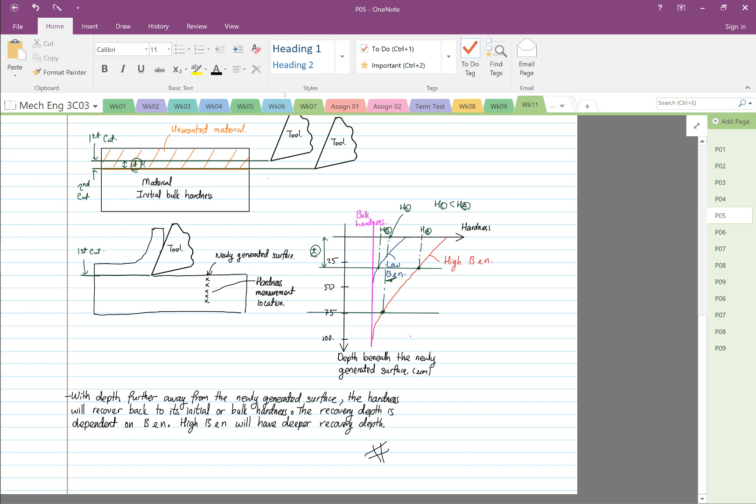Hi, this is the continuation of week 11 lecture, where we finish off by mentioning that if the material is strain hardening sensitive, you have to have a deeper depth of cut. As you can see, after the workpiece has been machined or processed, with high B and N the hardness is higher, and with low B and N the hardness is lower on the newly generated surface.

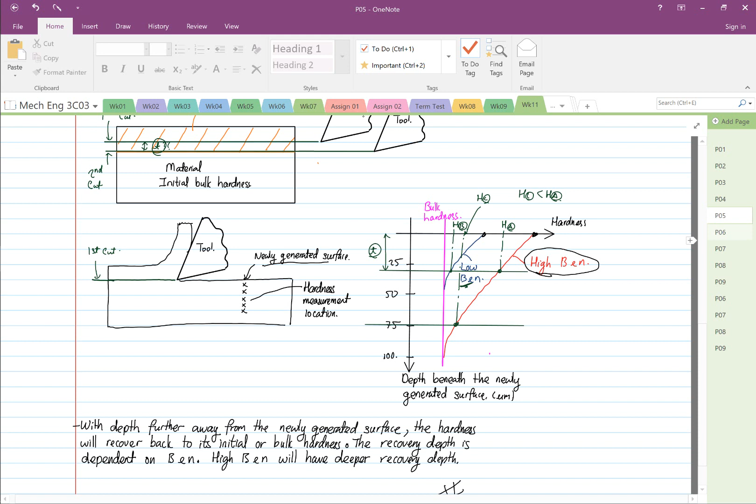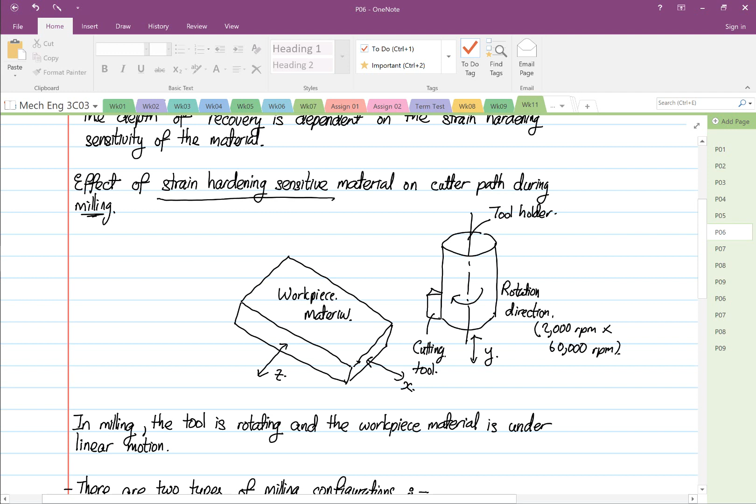So to continue, we are going to look at the effect of strain hardening sensitivity on cutter path during milling. This is a milling operation where you have a tool rotating between 2000 and 60,000 RPM, and the workpiece material is in linear motion in X or in Z direction. If you go to YouTube and type the word milling, you will see the process.

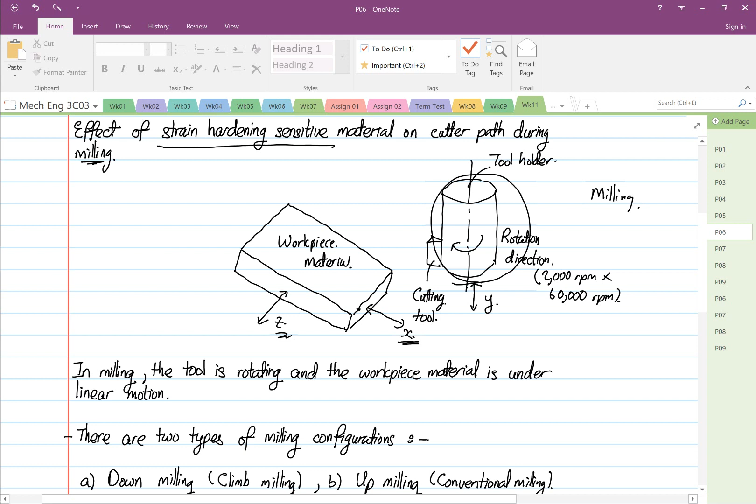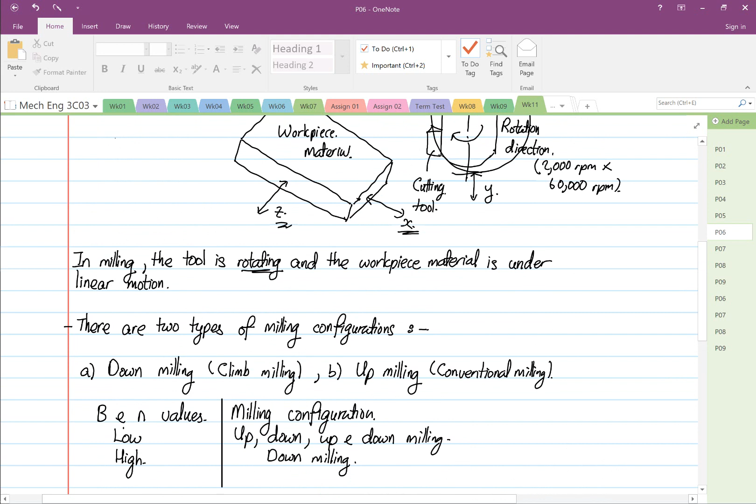So in milling, the tool is rotating and the workpiece is under linear motion, different from turning. And there are two types of milling configuration: down milling and up milling. One is known as down, the other one is up.

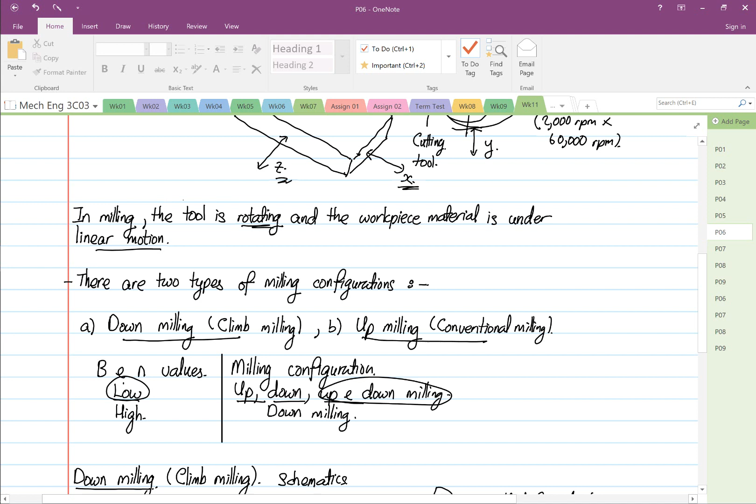So if you look at the B and N value, if you have low B and N, it does not matter whether you do up or down milling, or up and down milling, which I'll explain to you later. If you have high B and N, you only can use down milling. What do I mean by down milling?

So this is the schematic of down milling. In down milling, the undeformed chip thickness starts from thick and goes to thin. This is the tool motion. And if you look over here, I have superimposed the hardness value, the hardness distribution.

And when the material is strain hardening sensitive, you have to do down milling, or we call it climb milling. It's because if you do down milling, the workpiece will hit the tool where it's softer. As you progress further, the hardness increases, but it's okay, because the temperature in theta 2 is higher than theta 1, so it's okay.

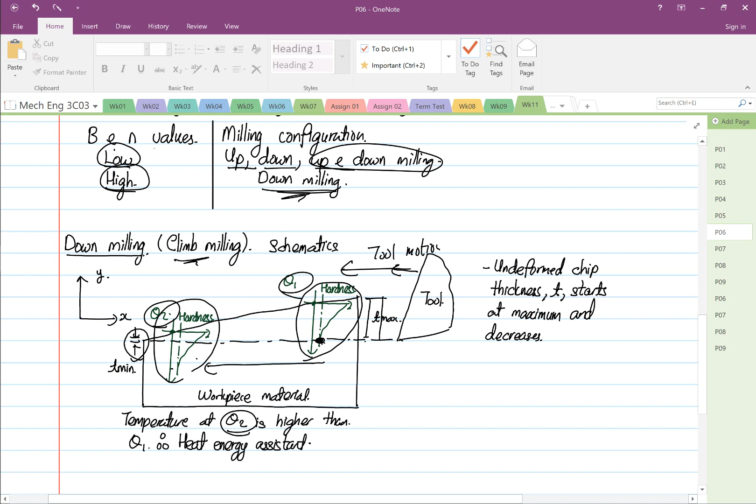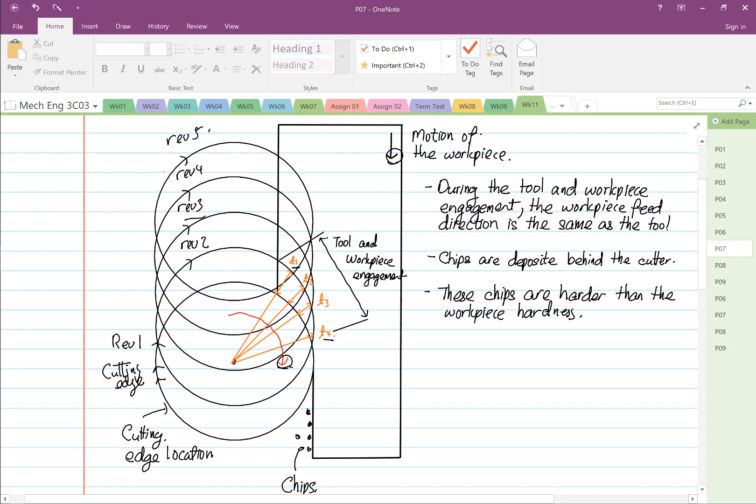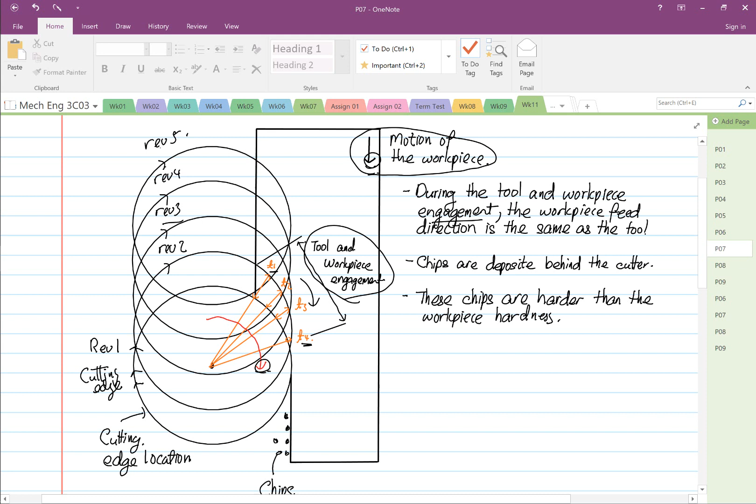So further on, this is the motion of the workpiece, and this region is the tool and workpiece engagement region. The workpiece feed direction is the same as the tool. So if you look over here, the tool is rotating in this direction, and the feed direction is also the same during engagement. The chips are deposited over here.

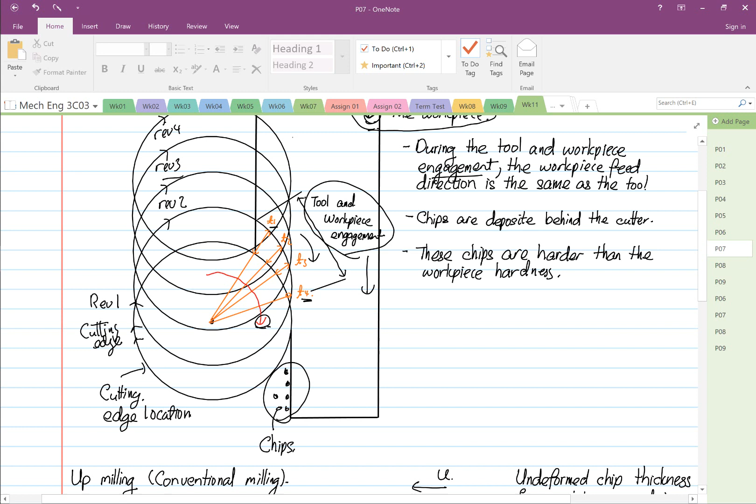So when that's the case, the chips are harder than the workpiece, so you have to be careful. These are very hard, but they're deposited behind, so it's okay.

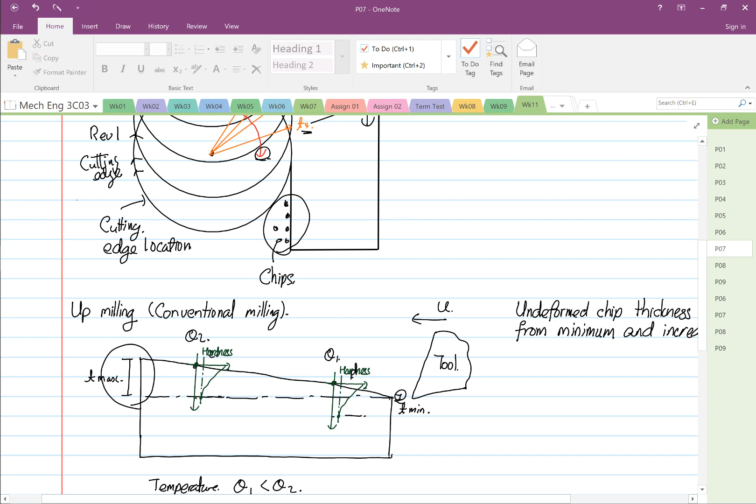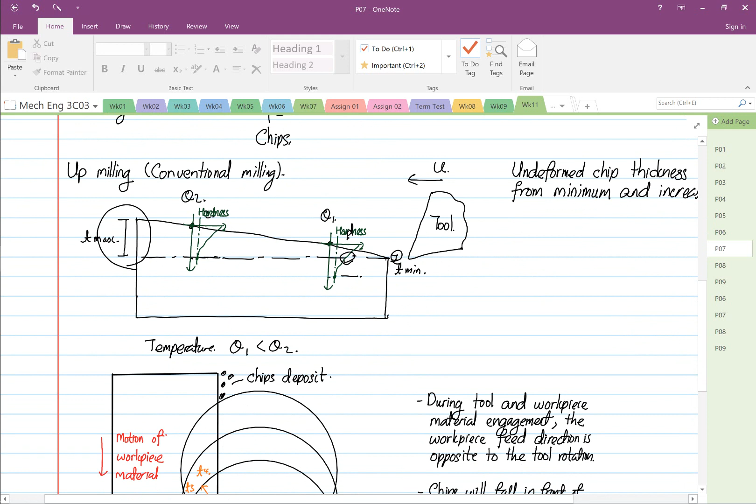In up milling, the undeformed chip thickness starts from thin to thick. So when that's the case, you can see the problem: it's going to hit the workpiece when it's very hard. And as usual, θ2 will be greater than θ1.

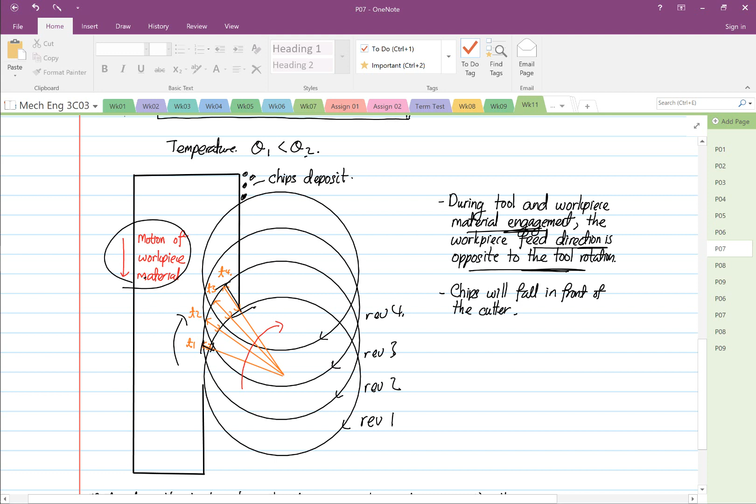So doing up milling, you see the undeformed chip thickness starts from thin and goes up to thick. You can see if this is the vector of the rotation of the tool, this is the motion of the workpiece, and during engagement, the feed direction is opposite to the tool rotation, and the chip will fall in front. When the chip falls in front, it's bad news because the chip can be carried by the cutting edge and hit the workpiece again.

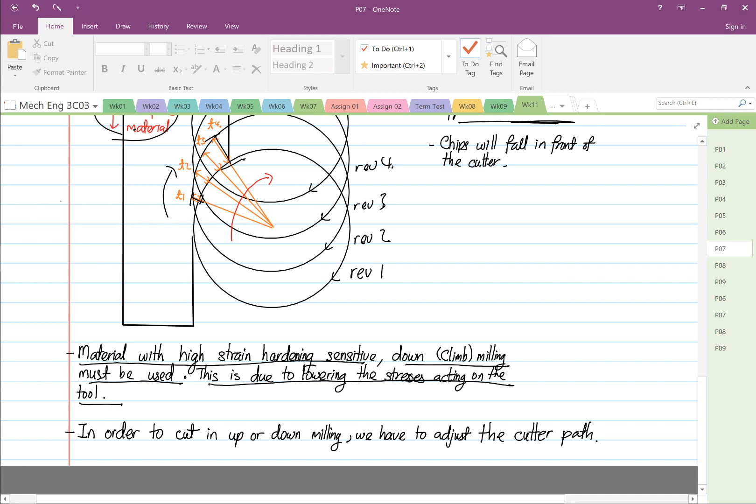Coming back to strain hardening, now that you know the difference between up and down (climb) milling: material with high strain hardening sensitivity must use down milling. This is due to lower stresses acting on the tool. Down milling hits the material where it's softer, or lower in hardness.

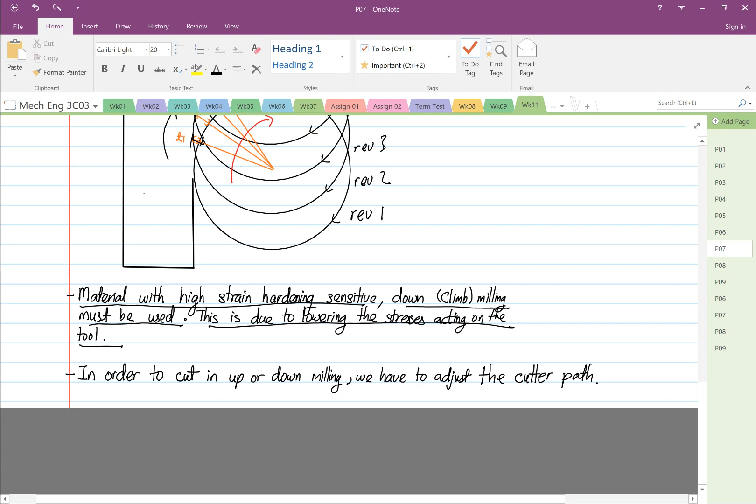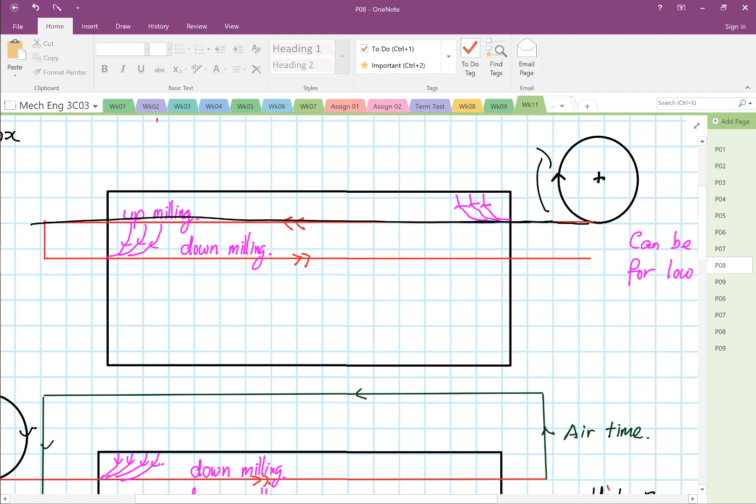In order to cut in up or down milling, we have to adjust the cutter path. Here's our workpiece material and our tool, with the red line as the cutter path. When the tool moves from right to left with the tool rotating in this direction, it's doing up milling. Then on the next pass, it does down milling.

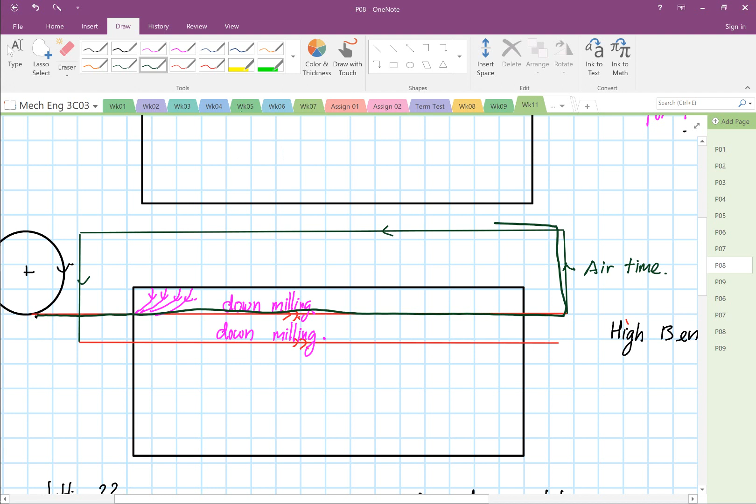This can only be used in low Ben. In high Ben, you have to start from here instead, so that every cut is down milling, down milling, down milling. Then it goes up again, over to the other side, comes down, and continues down milling. This is what we call modifying the cutter path—come back, air time, start cutting again, and repeat for the next pass.

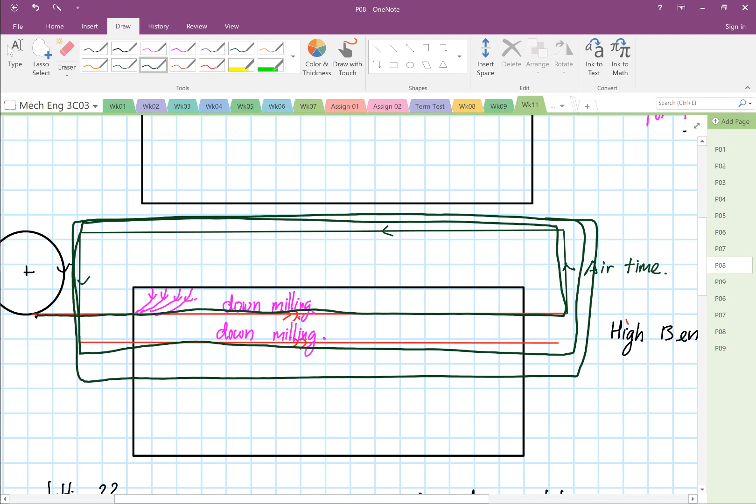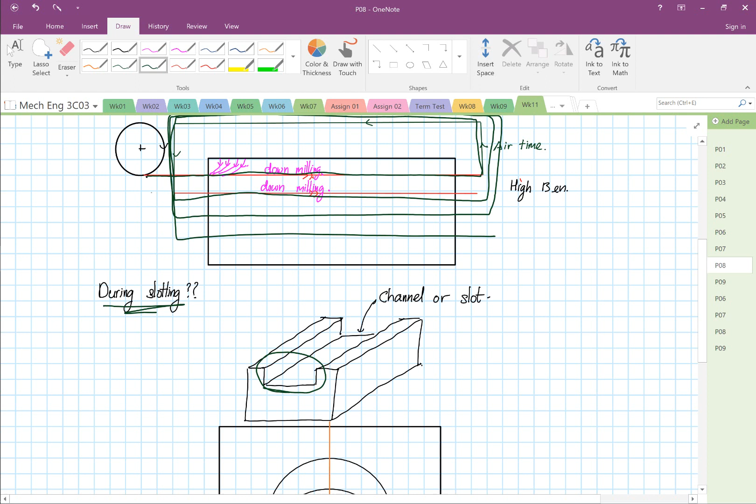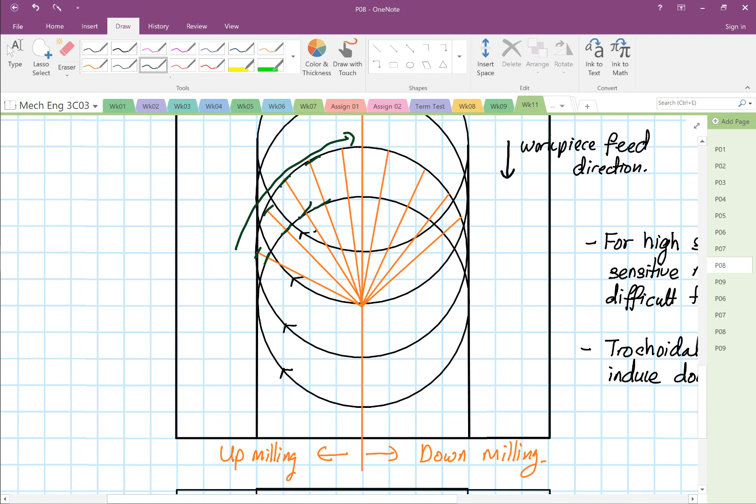Now, how about slotting? Slotting creates a channel like this, and it's always really difficult. Why? Because the tool has to pass through—down here you see the undeformed chip thickness go from thin to thick, and on the other side it goes from thick to thin. So it's a mixture of up and down milling.

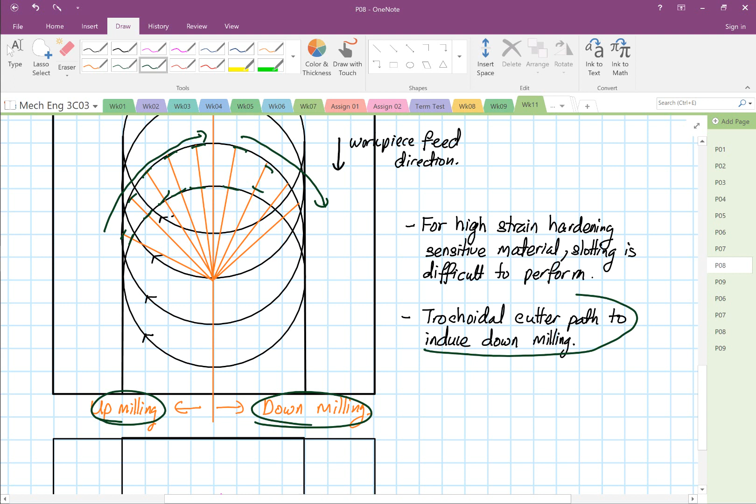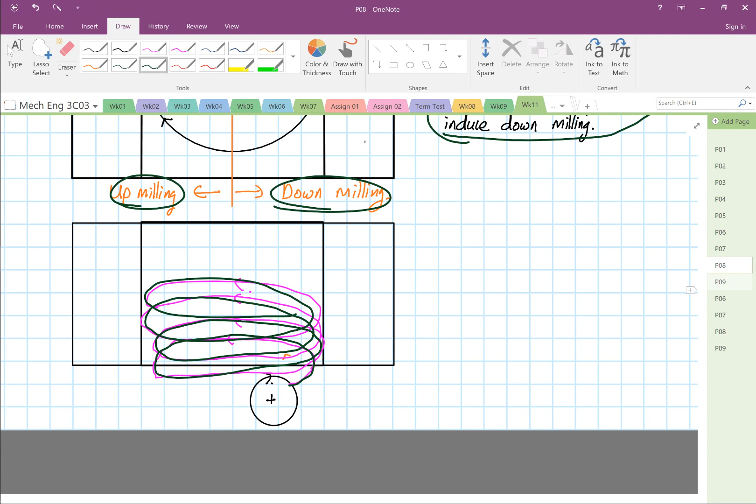The only way to do this is to use a trochoidal cutter path, where your tool path moves this way. This is the only way to machine strain hardening sensitive material, by using this cutter path. So when a material is strain hardening sensitive, you have to do trochoidal cutter path. You can look up trochoidal on YouTube to see better what I mean.

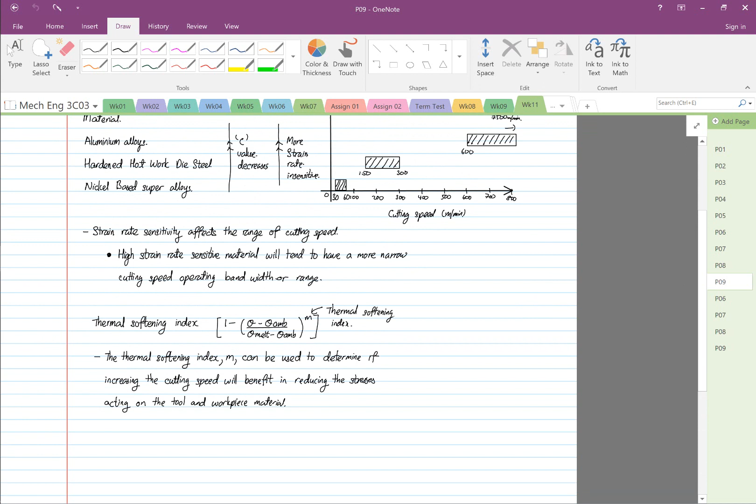Lastly, we're looking at strain rate sensitivity. Here we have materials: aluminum, hardened hot work steel, and nickel-based superalloys. The C value decreases as you go up this list—when you go to aluminum, C is lowest, nickel is highest, meaning aluminum is more strain rate insensitive.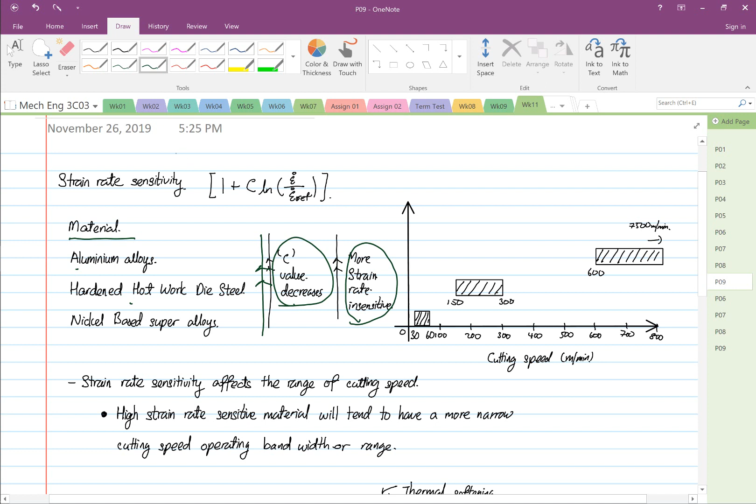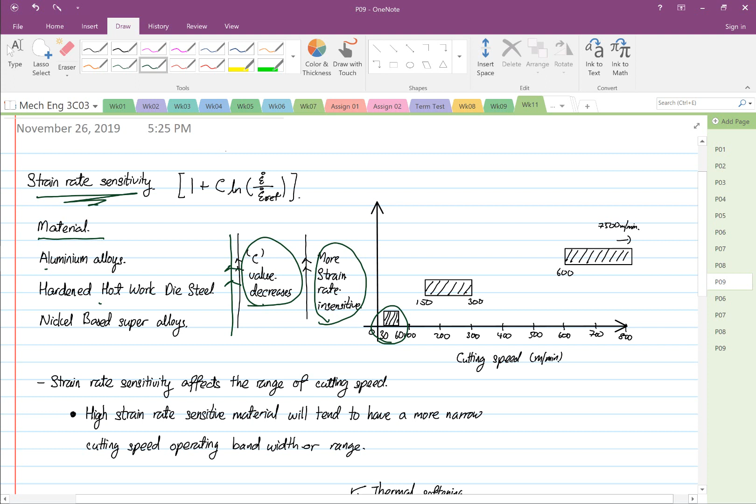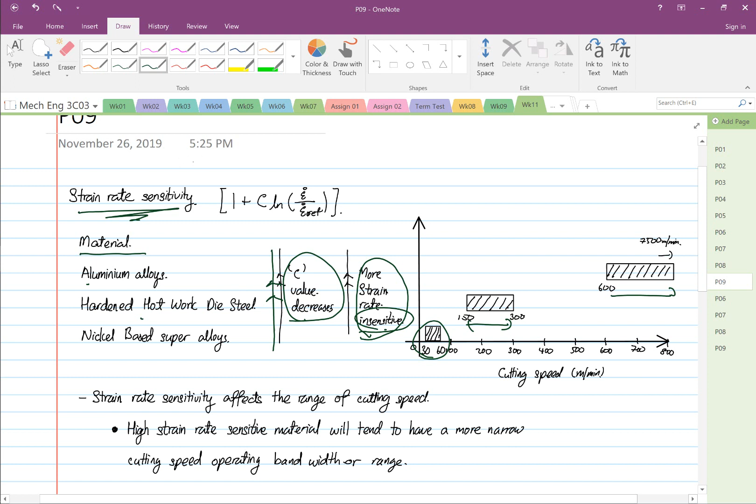In terms of strain rate sensitivity, it will affect your cutting speed range. For nickel, you can only do 30 to 60 meters per minute because it's very strain rate sensitive. For hot work die steel, the range widens to 150 to 300. For aluminum, it can go from 600 to 7,500 because it's strain rate insensitive. So strain rate sensitivity affects the range of cutting speed—high strain rate sensitivity tends to have a narrower cutting speed operation bandwidth.

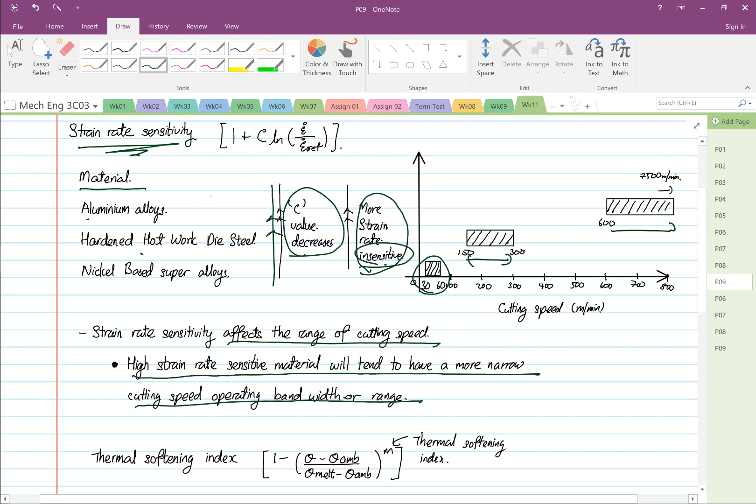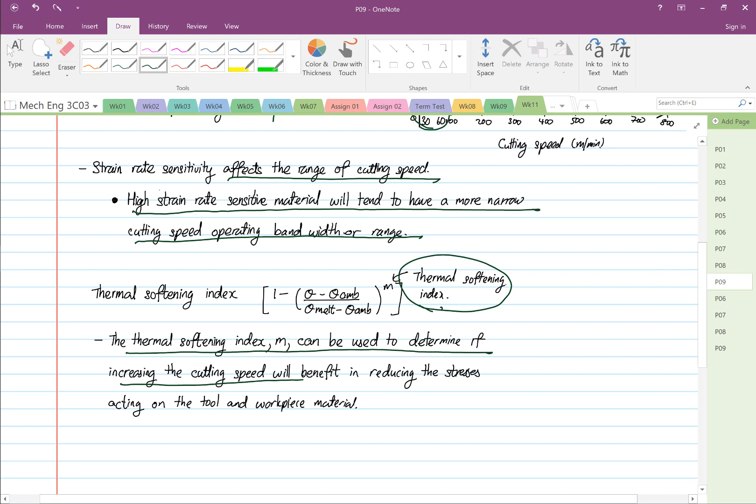In terms of thermal softening, it depends on your M value. The thermal softening index can be used to determine if increasing speed will help reduce stresses on the tool. If M is smaller than 1, increasing the cutting speed might help soften the workpiece. If M is greater than 1, increasing the speed will not help at all.